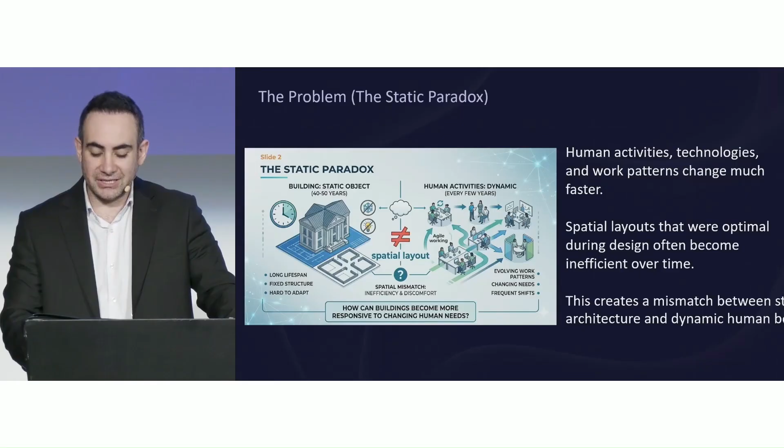When problems emerge, we usually attribute them to mechanical systems such as HVAC performance or lighting conditions. However, in many scenarios, the real issue is not the building systems themselves, but rather the spatial configuration of the environment. This raises an important question: how can buildings become more responsive to changing human needs? This question formed the starting point of this research.

The objective of the study is to explore how buildings evolve from a static container into an adaptive environment. Instead of treating spatial design as a one-time decision made during the design phase, we propose a system where spatial configuration can be continuously evaluated and improved throughout the building life cycle. To achieve this, the research introduces a framework that integrates two emerging technologies: digital twin systems and generative artificial intelligence. The key idea is to close the feedback loop between real-world building data and computational spatial optimization.

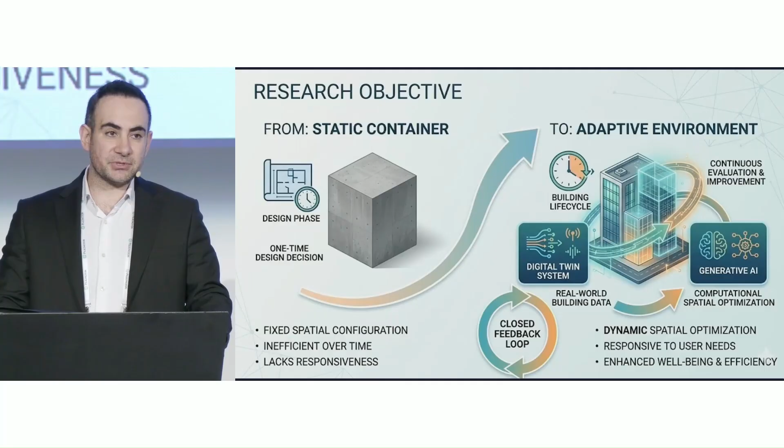Let us now look at the proposed framework. The architecture of the system is organized into three interconnected layers. The first layer is the physical layer, and this layer represents the actual building environment, including IoT sensors installed throughout the whole building. These sensors collect real-time data about environmental and behavioral conditions, such as occupancy level, acoustic conditions, and also thermal comfort. And the second layer is the digital twin.

The digital twin acts as a real-time virtual representation of the building. It continuously receives and processes data from the physical environment and updates the digital model accordingly. In other words, it functions as a dynamic mirror of the building. The third layer is the AI agent, which acts as the analytical and decision-making component of the system. Within this layer, we apply deep reinforcement learning techniques to simulate potential spatial changes and evaluate their performance. Through this architecture, the system becomes capable of analyzing spatial conditions and exploring alternative configurations computationally.

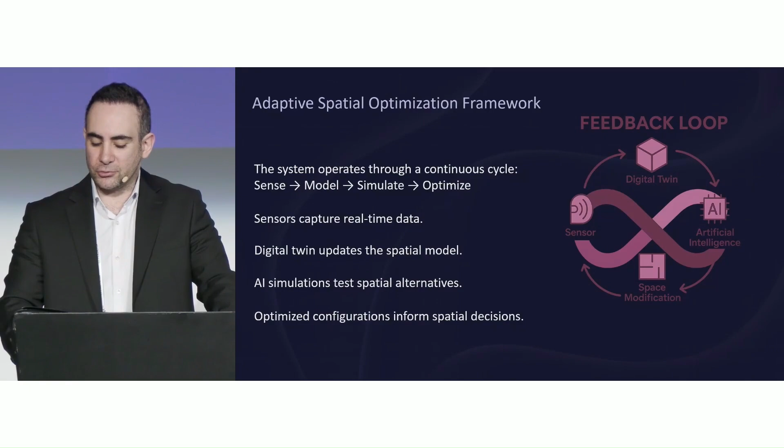To answer this question, the system runs thousands of simulations within the digital environment. Different spatial scenarios are tested, including variations in furniture arrangement, zoning strategy, and circulation patterns. Because all these experiments occur inside the digital model, they can be performed without disrupting the real building environment. And through this iterative simulation process, the system can identify configurations that improve both environmental performance and occupant comfort.

From a technical perspective, the framework bridges the gap between building information modeling and artificial intelligence. The geometry and spatial structure of the building is represented using a BIM model created in Revit, which provides the static geometry and spatial relationships required for simulation. Python scripting is used to manage the data pipeline, integrate sensor information, and control the simulation process.

The system is deployed on a cloud-based infrastructure using Microsoft Azure, which enables real-time data ingestion, scalable storage, and continuous integration of IoT sensor streams within the digital twin environment. Finally, the machine learning component is implemented using TensorFlow, where a reinforcement learning agent is trained to evaluate and optimize spatial configurations. Together, these technologies create a workflow in which building data, the spatial model, and AI algorithms operate within a unified computational environment.

Before applying AI simulation, it's important to understand what type of data drives the system. The simulation model relies on multiple data sources. These include occupancy patterns, environmental conditions, spatial context, and behavioral usage data. Together, these data sets allow the system to replicate the real operational conditions inside the building. This data-driven foundation enables the AI agent to evaluate spatial performance more accurately.

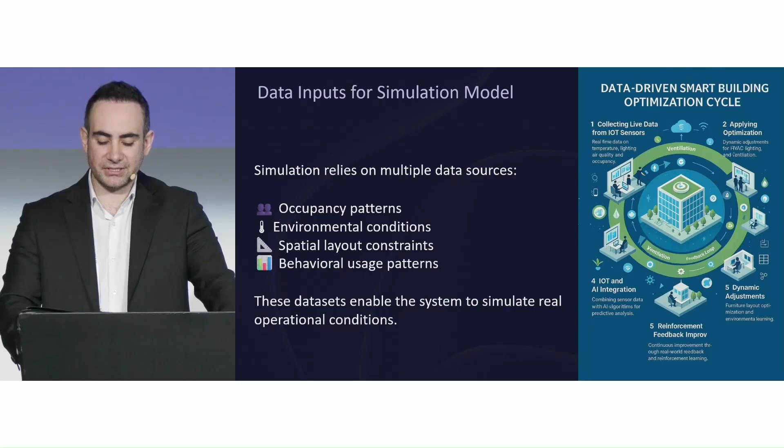At this point, an important question arises: is AI-based spatial optimization actually feasible in real architectural practice? To explore this question, we can examine one of the most influential industry examples in this field. The project is the Autodesk MaRS office in Toronto. In this project, Autodesk applied generative design techniques to optimize the spatial layout of their office environment. As you watch this short video, notice how the design process is treated not simply as drawing a plan, but as solving a computational optimization problem.

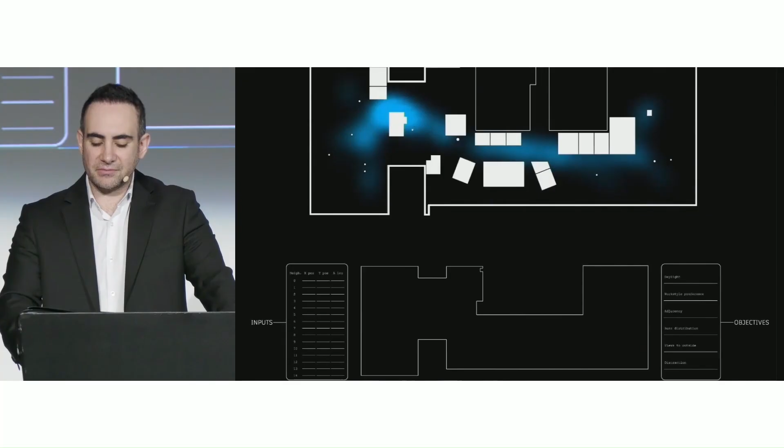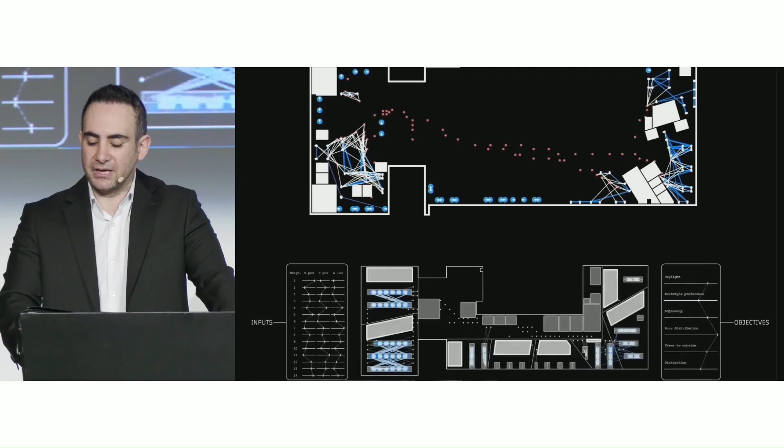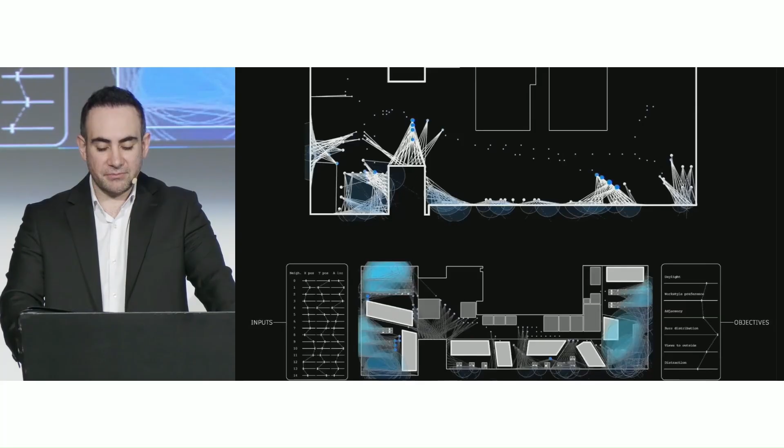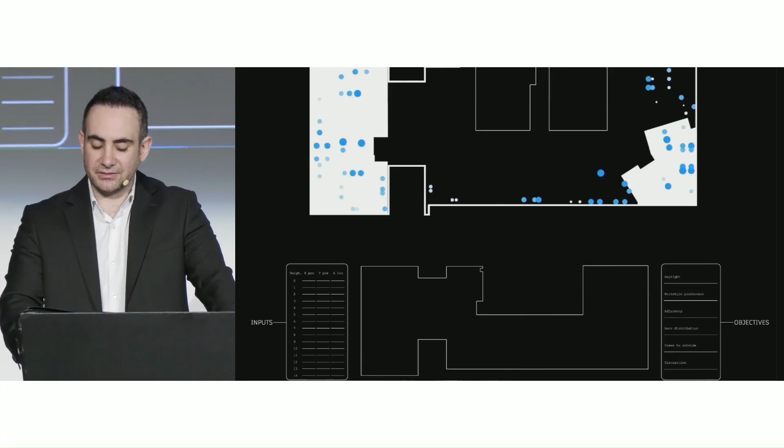In this project, Autodesk collected detailed information from approximately 250 employees, and they collected data including several types of spatial preference, for example, adjacency relationships, identifying which teams need to collaborate frequently, and they also collected information about acoustic preference, distinguishing between employees who require a quiet environment and those working in collaborative settings. Additionally, daylight access and environmental comfort preferences were included in the dataset. All these parameters were translated into computational constraints and objectives.

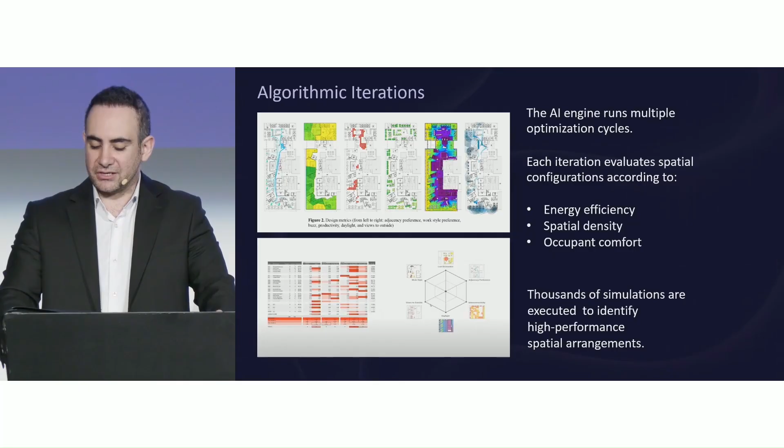Using the parameters, the generative design produced approximately 10,000 different spatial configurations. Each configuration was evaluated against multiple preference criteria. The algorithm had to balance competing goals such as spatial density, access to daylight, privacy requirements, and collaborative proximity. These processes demonstrate how artificial intelligence can explore a design space far larger than what is typically possible through manual design iteration. The result is a set of optimized spatial layouts generated through computational exploration. However, these optimizations happened before the building was actually used.

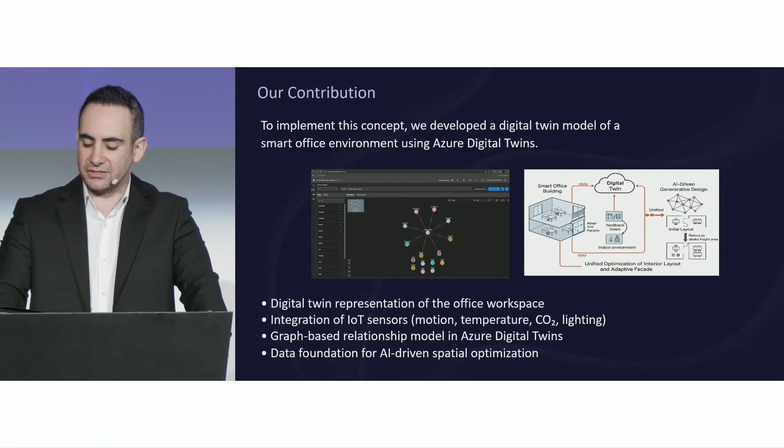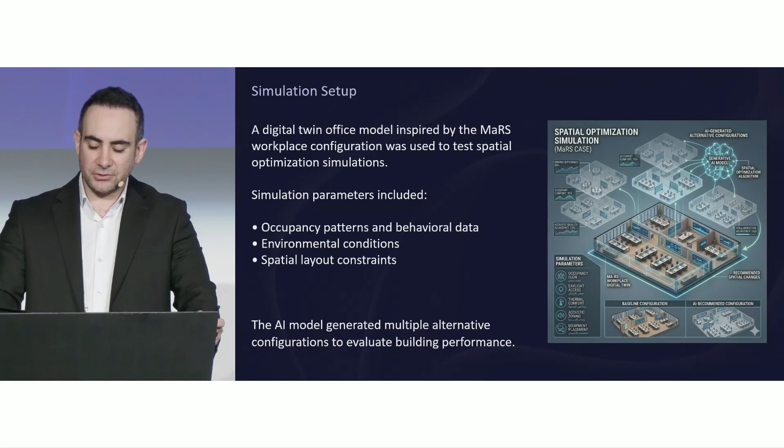However, this example also revealed an important limitation. The optimization process in the Autodesk project occurred only once before the office was built. After construction, the spatial layouts remain relatively fixed, and our research proposes the next step in this evolution. Instead of performing spatial optimization only during the design phase, we propose a system capable of continuous optimization throughout the building life cycle. By integrating digital twin and AI simulation, the system can repeatedly evaluate spatial conditions as the organizational pattern evolves. This enables buildings to respond to changes in occupancy, work patterns, and environmental conditions over time.

Simulation results. To test the feasibility of this approach, we conducted a predictive simulation based on a typical open plan office floor. Within the simulation environment, the AI agent evaluates multiple spatial configurations while considering environmental conditions and occupant distribution. Based on a simulated 3-month evaluation period in a controlled digital twin environment, the results suggested several potential improvements compared to the baseline configuration. The results indicate notable improvement in energy performance and occupant comfort. This improvement was primarily associated with optimizing spatial density in relation to daylight availability. Although these results are based on a simulation, they suggest that spatial optimization can significantly influence both environmental performance and user satisfaction.

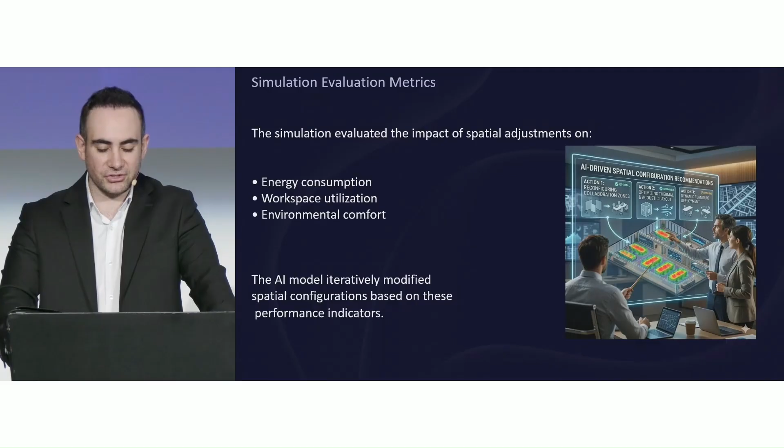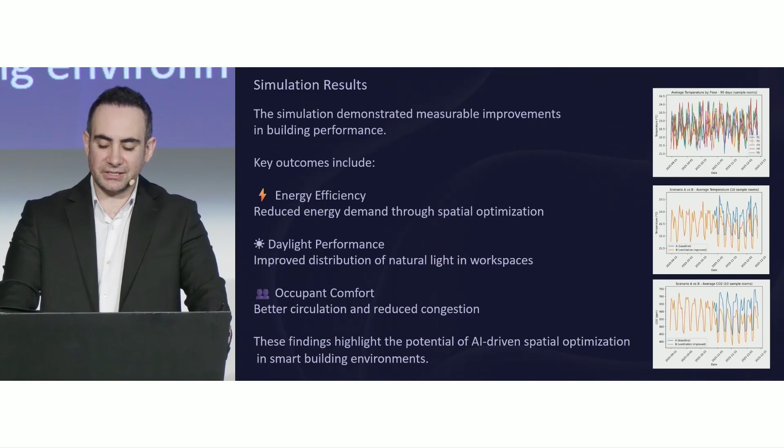Despite these promising results, several challenges remain. One of the most important issues concerns human agency. If an algorithm suggests moving furniture or reorganizing a spatial zone, how much control should occupants have over these decisions? Our findings indicate that the system should not operate as a fully automated mechanism. Instead, it should function as a decision support system for facility managers and designers. In this model, the AI provides recommendations and analytical insight while human stakeholders retain final decision-making authority.

To conclude, the future of the smart building may not depend solely on improving mechanical systems or energy technology. Equally important is the ability of the building to adapt spatially to human needs. By integrating digital twin feedback loops with AI-driven simulation, we can move toward a new generation of built environments that continuously learn from data and evolve over time. Such adaptive environments have the potential to improve energy efficiency, spatial performance, and occupant well-being simultaneously. To wrap up, we believe that the true intelligence of a smart building lies not just in its sensors, but in its ability to adapt to the people inside.

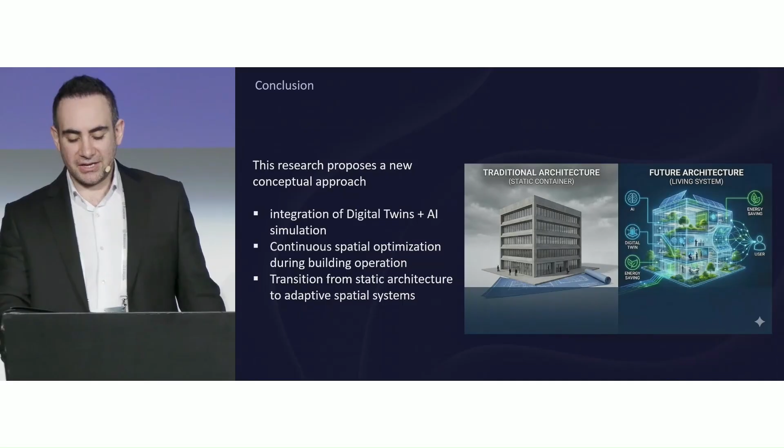Any questions starting from the audience? I'll start with a few, very interesting outcomes there. I'd be interested, first of all, did you find during this research some common things, like what are the lowest hanging fruits you see from the data that would improve the well-being of people in the spaces? Of course, because